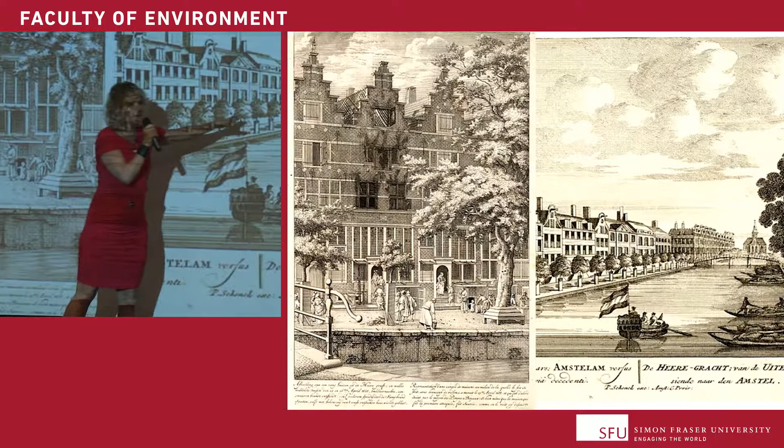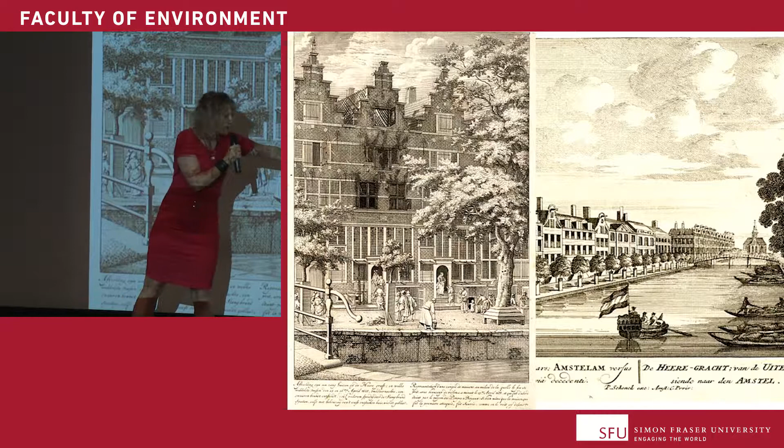And what you see from the 17th century is that they were planting trees. And they actually formed a really stiff structure for it. They made the regulation: it was exactly 4.3 meters between the trees, because it was a construction. And they protected the trees very well. Here you see a very small one, and it's all encased in wood, and over there too. So they also created a maintenance program around it.

And then you got this interesting thing, that they figured out that these trees were actually cooling the city. They were not only making it beautiful, but they also had a cooling capacity. So what did they do? They put trees on the squares. And especially this one, called a meat square. That was where the slaughterhouse was and the meat was sold. Indeed, they didn't have refrigerators, so you had to figure out something to keep things cold.

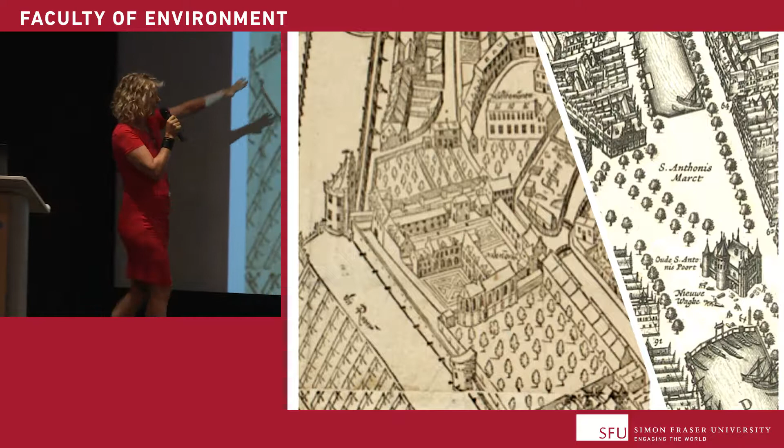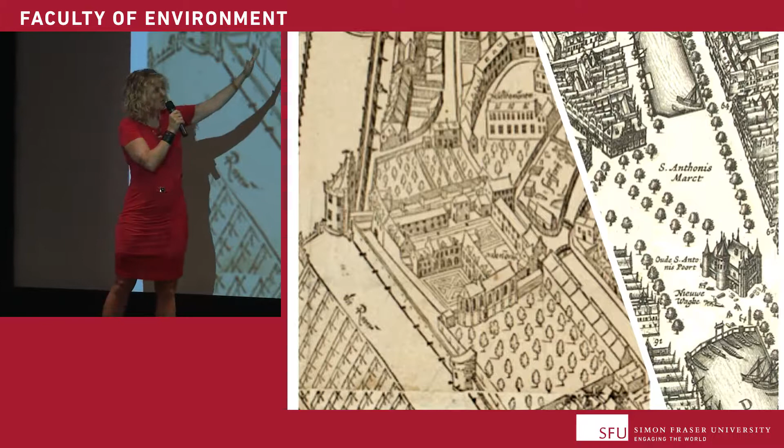So what you see over a century, actually, is that first, this is 1540. There aren't any trees on roads. There are only trees in the gardens of the church. And from 1600, you see this structured pattern of trees on squares and on the canal walls. They didn't put it on the regular roads, because that was meant to be for traffic, from side to side

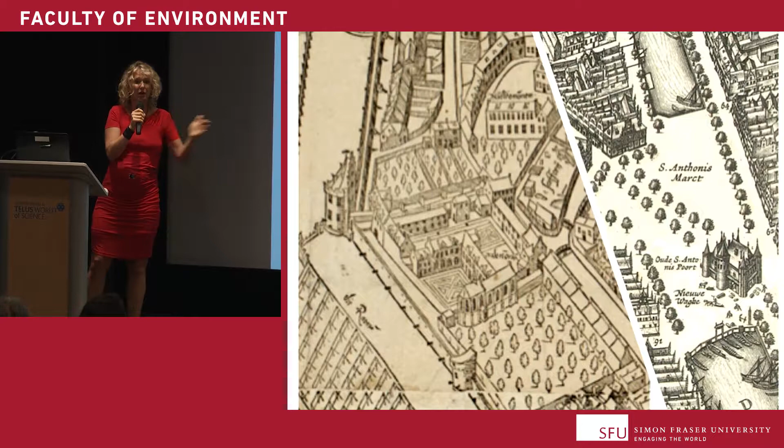for traffic. And I think probably this is a picture of one of my first colleagues working, having his job maintaining the city. These were the people who were planting the trees. But not only planting the trees, they had the tree nursery and the whole economy around it.

Because they started, funny enough, with Linde. I think that's a common name here too. And it went over to Elms. And that was because the wood of the Linde was too soft for the furniture industry. So there was a whole industry behind it. Rethinking green infrastructure is a multi-purpose benefit. And it's a new economy, creates new jobs.

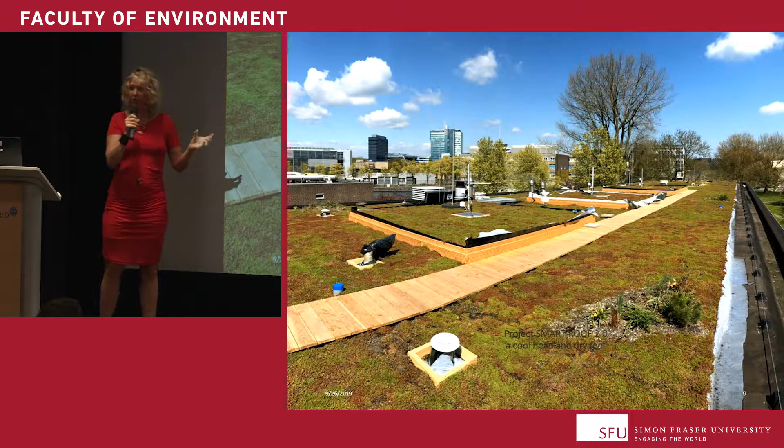Well, one of the things that we do in Amsterdam is that we use a small part of our maintenance operation for innovation. So an innovative approach. What can we do in our regular maintenance? And this is a regular maintenance of a roof, and we created on top of this roof a living laboratory in which we're figuring out how these circular nature-based solutions are working.

And what you see is two very different plots. Actually, one plot has access to water and the other hasn't. And you see the difference: after some months, the plot without the water doesn't develop at all, doesn't provide us the ecosystem service that we needed. And as soon as the plot has access to water, and I will give you later on some details, but I don't think it's very relevant for this presentation, the fact is that the more evaporating capacity we provide to the city, the more interesting nature we have.

And that's not only for the flowers, but especially for the creatures that we want to support in our city, our bees, our insects. And with bees and insects, there are coming birds, and after birds, there are coming foxes. And then we start the whole process over. This is the end of my presentation. We are taking the next step every time, and let's rethink nature together again. Thank you.

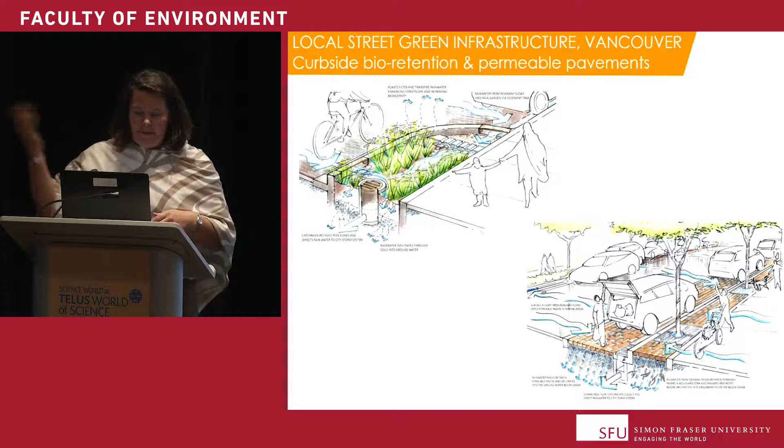So Adil said very explicitly, don't talk about the problems. This is all about the innovative ways that we're all trying to hold the sky up through the work that we're doing. And so I thought I would just touch on a few examples of some of the work that we're doing in Vancouver, starting with green infrastructure in streets and lanes. So here's a couple of snapshots of what you probably see around. Those of you that live out in some of the local residential streets, you might see these nice little bioretention curb bulges. We've got examples of the permeable pavements that are actually here in the Olympic Village.

But as we move forward, we're really looking at how do we be more innovative and start changing our green infrastructure to get an even better performance. So I love the pictures of the beautiful big trees in Amsterdam, and having been there recently, those are very, very small public rights-of-way that are supporting very, very large trees.

I remember early in my career, I put some trees in actually on Kingsway, and I look back now and I actually feel bad. Like I actually made those trees suffer because I didn't give them enough soil in how I did the designs. This is when I was working in transportation. And so now looking at it as a new lens with green infrastructure, we're looking at some new typologies, and this is one of them that we're really excited about, and we've actually done quite a few now in the city, and we're monitoring for performance.

This is called the rainwater tree trench. So what looks on the surface like any other street is actually a huge and ample space for soil and rainwater runoff beneath the surface. So right under the boulevard, right under the bike lane. And the intent of this is basically to give those trees the soil and the nutrients and the water access that they need to be very healthy trees with very large canopy so that they become, again, part of our water system. Most people don't think that trees are actually like giant water pumps. They help transpirate a lot of water, and they also help cool our city and bring so much habitat value.

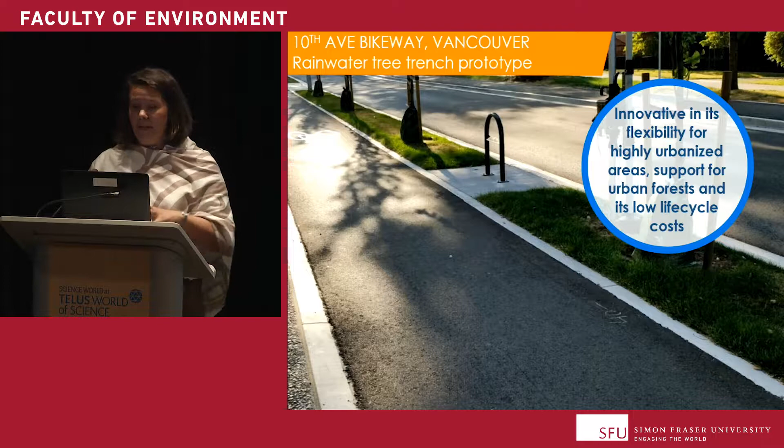So we're quite excited about this because in many parts of the city, it's very, very dense. And when you talk about bringing in bioretention or bioswales into the public right-of-way, a lot of people get nervous about how we're going to fit it all in. Well, this is a green infrastructure strategy that allows you to benefit from the ecology in the soil to help clean the water, the ecology with the root system to help address pollutants, and then again get nice healthy trees in our city.

This is another project. So down on Quebec and 2nd, actually just in this neighborhood, you can go for a nice walk and check it out after if you like. We've actually got a pilot project where we're doing 4 different approaches to green infrastructure in this one area. We're doing a conventional street approach, we're doing bioswales, and then we're doing a stormwater or rainwater tree trench using a structural soil approach, and then one that's using a soil cell, which is like a plastic crate that actually provides the structure and then an ample volume for soil.

And so as part of that research, we're testing to see how well the different systems perform. We're looking at how much they cost to maintain, because maintenance budgets are always top of mind for many, many folks, especially at the city. So one part of the pilot project that we're testing here is actually using a sedum mat, which most people use on a green roof.

So we're actually trying to see if it is a viable alternative to a grass boulevard. So you don't need to mow it, and it tends to be very drought resistant. Looks good. I mean, right now it's flowering. I don't know how it looks at the moment. We'll have to monitor that. But it's just another one of the little ways that we're experimenting and trying to explore how we can use green infrastructure to its fullest potential and make it cost effective and also enjoyable for the city.

So for Vancouver, we've been doing green infrastructure for probably about 20 years, but what I would say is that we've typically done it as a one-off initiative. So we've had some great leadership in the private sector, we've had some great leadership in the public sector and at Parks Board, but we failed to make the transition from pilot projects to a broad new way of doing business. And so one of the pieces that we're doing now is trying to say, how do we not use these as a nice to have or the icing on the cake or the little dusting of green on the urban jungle here in Vancouver, but actually a really strong part of our water management systems.

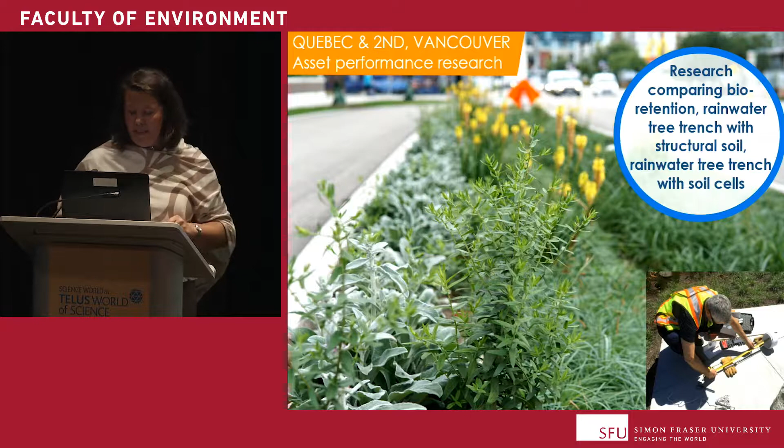The storms are coming in. It's staying for the right amount of time to get the water quality treatment. They're drawing down, and the water is going back, soaking back into the earth. So so far, we're really pleased with how that's progressing. I mean, this is maybe a little bit more on the technical side of things.

This is 63rd and Yukon. I'm not sure if there's any folks here from South Vancouver area, but I encourage you to go down there. This was a leftover corner piece of land in the Marpole neighborhood. And as they were going through their community plan, the community identified it as a potential for like a little mini community park or some such amenity.

And so some keen eyes in our planning department thought, well, this is actually an opportunity to showcase rainwater management and how can we bring that into a community amenity and public space. And so there's a beautiful project down there that's actually just a really enjoyable place to be.

We've got a neat partnership with the Museum of Vancouver and some local Indigenous youth from Musqueam, Squamish, Tsleil-Waututh, and Tsawwassen Nation that have produced some beautiful artwork that we're hoping to install in the coming year at this site.

And for us as a city, it's been a chance to actually test some new ways of delivering the service. So we've got some new inlet designs that we're trialing for our construction crews. It was learning about what are the methods that they need to use to allow water to infiltrate back into the ground and not excessively compact.

And of course, for our crews, it was also a really innovative initiative in that we were able to reuse the soil on site. So rather than preparing a construction site by scraping all the soil off, taking it away as a waste product somewhere, and then bringing in fresh soil for all of the plants, we actually had our team, urban ecologist, look at how we could amend the soil to bring the right composition to get the outcomes we want, both for plant health, but also for dealing with the pollutants in the stormwater.

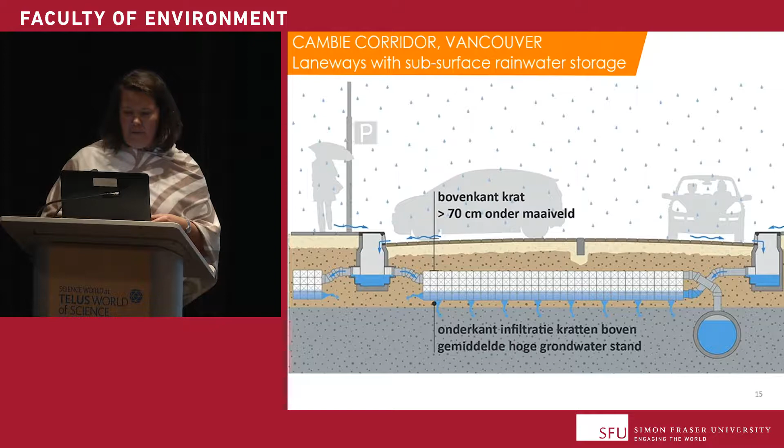This is just a little snapshot, and you can tell that the Dutch are everywhere. They're influencing us in big ways. But thinking about how we can actually make better use of our roads, because right now roads are just generating rainwater runoff that's often polluted. How can we actually use these public spaces to help us better manage water, even if we still need to have that kind of surface use?

So just a couple of other examples of things that are sort of inspiring our thinking here in Vancouver. This is the MEC head office, actually in the False Creek Flats neighborhood. And what was exciting about this project, it was one of the first Salmon-Safe projects in Vancouver. I think the airport is also designated as Salmon-Safe, and that means that they're taking great care through their entire development process to look at how the building can protect and enhance salmon habitat.

So they're looking at how they capture and clean the pollutants. They've got green roofs, they've got blue roofs for a water harvesting system, and they've got a whole range of bioretention systems and filtration systems, both for their parking lot and the front.

So that's a really great example of leadership from the private sector. Smart Roof 2.0. So a team of us actually went to, this is how we first met Sasha. We went to Amsterdam. We were very inspired by the Smart Roof.

I think what really stood out for me is that in our community, our current standard is to manage 24 millimeters of rainfall a day. And we go into the Netherlands and they tell me that they're managing a minimum of 60 up to 150. And I said, boy, when we talk to our development community, I saw Margot and a few other people from industry here, you know, when you talk to them, okay, how can we manage this much more water in Vancouver with climate change? We really need to. They look at you like, we're not sure how to do it.

And so I thought, okay, well, look at what they're doing in Amsterdam. If they can manage 60 millimeters and think about how to create these incredible biodiverse urban cooling hotspots in their most urban and dense areas, including on wood frame buildings, so can Vancouver. So what we're really excited about is that we now have a partnership that we've initiated with the City of Delta, with BCIT and ourselves.

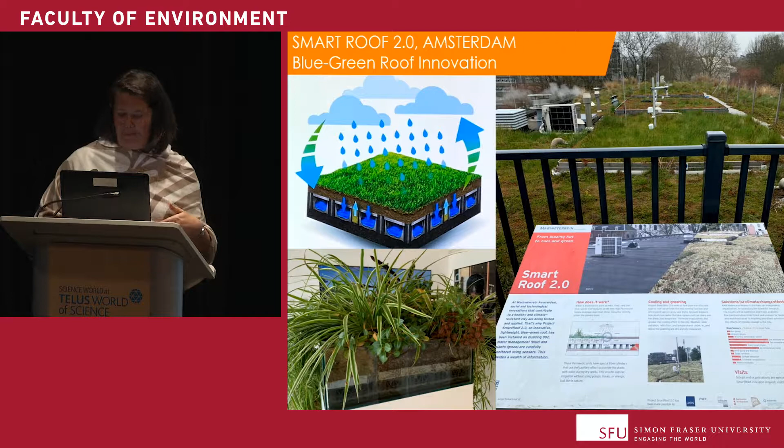There we go. Okay, something else that I'm quite excited about for Vancouver is the idea of water harvest and reuse. What a lot of people don't realize is that in the future, water scarcity is going to become much more of an issue, and people perceive water to be plentiful here. And so thinking about how we can harvest and reuse water to meet our future needs and manage stormwater is something we're really excited about.

Obviously, this is a real showcase, and most people don't realize that this beautiful convention center that has a fabulous green roof is also treating mass quantities of black water. And it's funny, the operator said to one of my staff recently, gee, I wish we could just get more toilet water, because actually our production facility could do a lot more. We could be generating a lot more water for the community. So these are some of the ideas of thinking about district scale systems and how we integrate water harvest and reuse into our long-term objectives.

Okay, so in our local neighborhood, again, looks great, Olympic Village, beautiful, love the Terra Breads and all the other great places to go there. But what I'm not sure if you know is that our most beloved Hinge Park is actually a stormwater wetland. Hinge Park is actually managing 2/3 of the stormwater runoff from the entire community. The other 1/3 is in the giant bioswale along the bike route along Ontario Street, which I'm sure many in this audience know.

So our stormwater infrastructure there is doing so much more than just caring for water. It's creating amazing habitat, including beaver habitat. Maybe the locals can let me know, I heard that the beaver had 2 babies recently. Yeah, 2 babies. But beavers are very territorial, according to our Parks Board biologists, and this is problematic because the beavers are growing up and they've got no other habitats to go to. So I don't know what's going to happen with that, but it's the same challenge for all of the millennials and others in Vancouver, that we have a serious housing crisis. So we better start looking at where we can expand our habitats for beavers in the city.

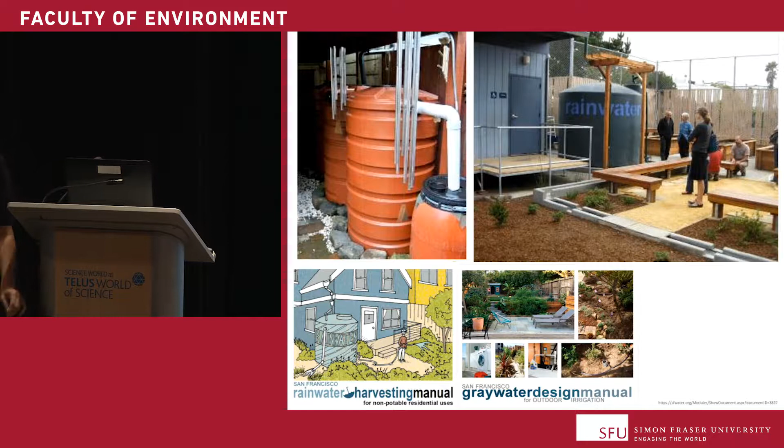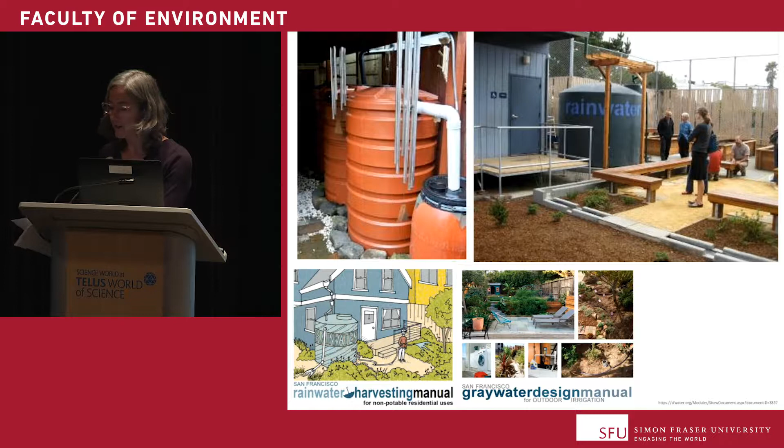We were approached by a woman who was an epidemiologist at the Department of Public Health, who wanted to basically install her own rainwater harvesting and reuse system and treat it to really track and monitor the public health impacts and the quality that she could achieve in her own home. But there was no guidance and there were no rules for her to follow. And anybody that came to the departments was just getting flatly denied. And so we felt like that is something we really wanted to take on and work through.

So we created a working group with our Department of Public Health and our plumbing inspectors, and we hammered out the first memorandum of agreement that was approved by the Public Health Department for flushing your toilet with rainwater. And the funny thing was that the first response was, oh, well, you have to be able to drink this water. We're like, really, from the toilet? And so we continued to have this discussion and really talk about the perception of risks and the actual risk.

And through these discussions, it really became clear that we had a pretty open-minded public health department. And the gentleman, Rajiv Bhatia, who was the department lead at the time, said, you know what? The rainwater is not the dirtiest thing in your toilet. And we were like, you know what? That's right. Because he said, as soon as you take a toilet on, it's really up to you to make sure that it's clean.

And the response that happens when you have an overflow is basically people mop it up with some bleach. And so basically you were covering the same risk response for much dirtier water than you would with the rainwater. And so we were able to achieve an agreement that allowed you to flush your toilet by just simply diverting the sediment. There was no advanced treatment required. And so that was a really wonderful breakthrough, and I would really encourage people to meet with the people in San Francisco and talk through what the lessons learned were, because it's a fairly rational response.

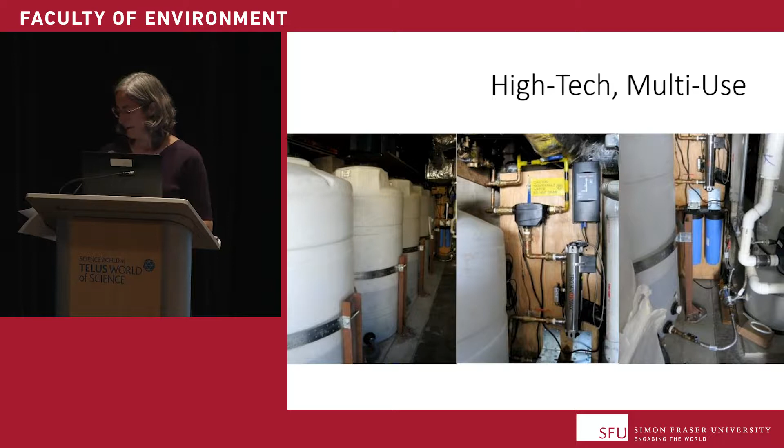And so in a parallel effort, and my beloved old colleague Donna Haase is here today. She was a team member on this project, so it's kind of a treat that she's here.

In a parallel effort, I was invited to be part of a team that was developing our new agency headquarters. And at the time, we'd been asking our ratepayers to really have a lot more investment in conservation and adhere to higher standards for conservation. And our leader at the time challenged a small team of us to develop a sustainability program that would really walk the talk and to showcase these sustainable measures that would either look at power, wastewater, and water.

And so 98% of the conversations were about power, right? And he had asked us, can you try to get an off-the-grid high-rise? And so that was the challenge that we were to look at. And almost everything that I'm talking about is in a built-out, dense urban city. So this is really the challenge, right? And this neighborhood is considered a historic designation neighborhood that we're in. It's a Beaux-Arts neighborhood, so just to set the context a little bit.

And so what ended up happening was we focused a lot on power, and at the 11th hour, we had looked at doing an on-site wastewater treatment that was a high-intensity energy use, but it continued to blow the power budget for the building. And so we looked into these low-energy wastewater treatment systems, and we developed something called a living machine, which is a constructed wetland that pulses the wastewater through it twice a day. So it mimics a natural wetland system. So it has a high level of biological activity.

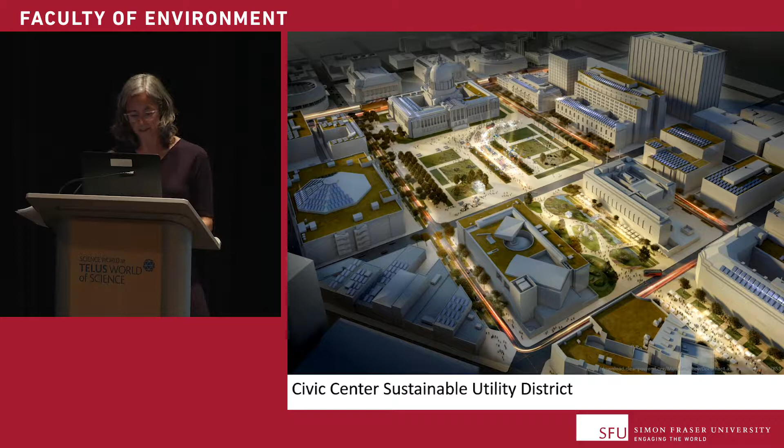Not only would it be that, but it's also a very highly visible tourist destination, so it could be a great educational environment. So a lot of this thought leadership coincided with the beginning of a pretty serious drought. And in 2012, the agency really committed to reducing its potable water intake by about 10 million gallons per day. And I didn't translate to metric system for you guys, I apologize, and launched the non-potable water program.

And then in the Bay Area in San Francisco, we have a lot of these high-rise developments that penetrate the groundwater, and they're continuously dewatering, and that's another great source of water. And the co-benefit of that is it's not taking up space in your sewer all the time. So it was really for the first time that both of the departments, the wastewater and water departments, were working together, really thinking about how these different goals could play together, both from a regulatory standpoint and from creating incentives and strategies around these things.

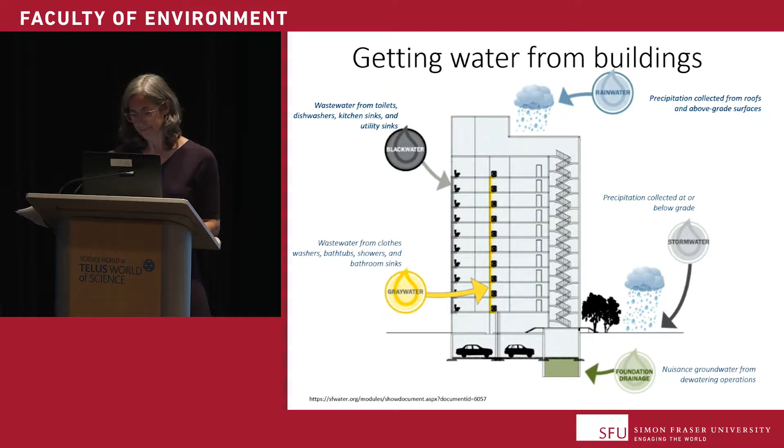So the program really evolved over time. We began first by just allowing it to happen, right, in a single building. And then the question was, how do you do the governance and the oversight going between buildings? And then over time, we began to require this of all new buildings. So all buildings over 250,000 square feet in San Francisco have to put these non-potable reuse systems inside.

And it is creating a lot of change, right? This is a brand new set of ways of doing business for the industry, for designers, for the utility practice. But it is a drought-stricken environment, and this is basically water that is available and would have just all been wastewater at that time.

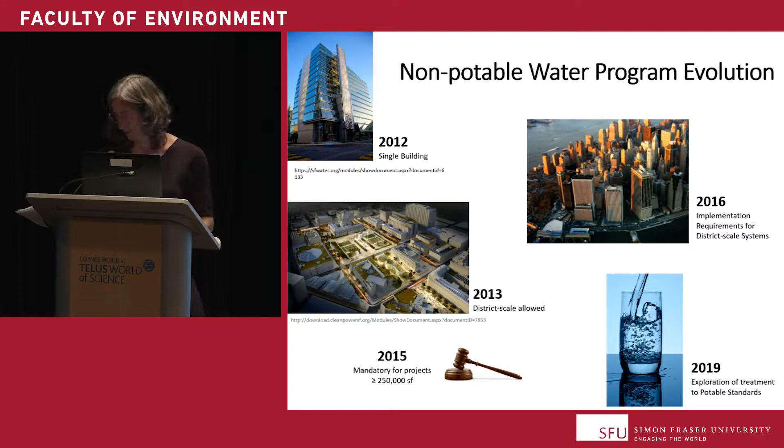And recent advances are that we're now beginning to look at how to take this black water and treat it to potable standards. And so there's a demonstration project at the agency right now to do that with the living machine water. And so if you go to San Francisco, you can begin to see these projects that are sprouting up that really show the coming together of these different ordinances and guidelines that all got into place. So this is really what the use of rules and regulations and advanced planning can achieve over time, especially when you have a really robust development community and you get these systems in place in advance.

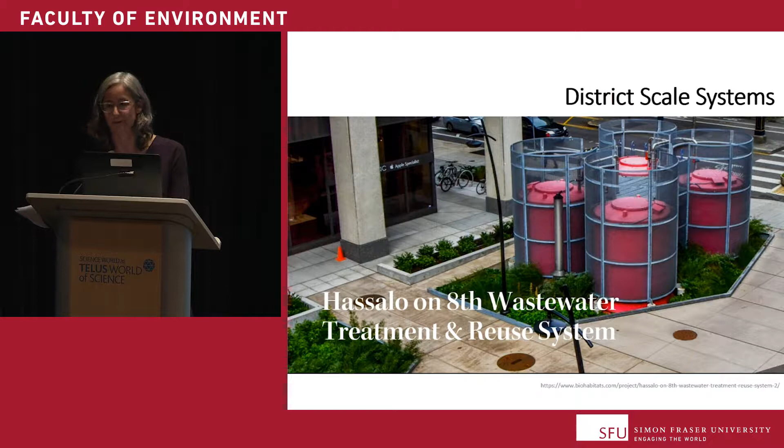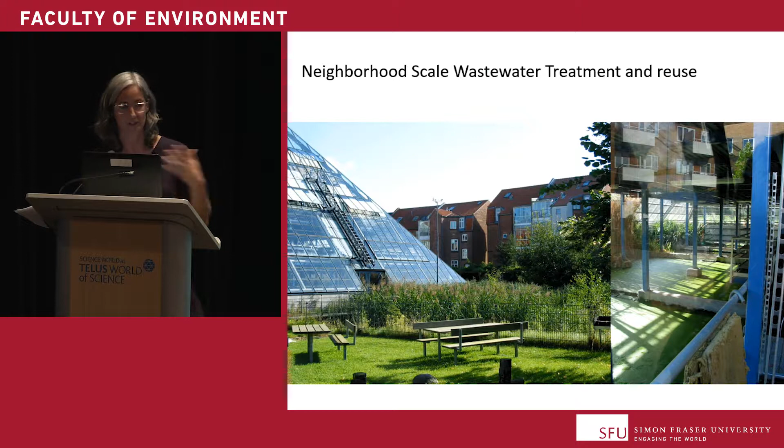And so there's some examples. I think San Francisco really stole a lot of ideas from a lot of great examples from different places. Portland's been working on district scale systems that you can go and see. When I was in grad school, I went and visited these really wonderful and whimsical examples. This is a lower density residential block in Denmark, or in Norway, which has a wastewater treatment system that also is used for growing plants. And so it's an economic development project where they're selling 40,000 plants per year. That is raising money as well for the neighborhood.

Here's an example of an ecological laundry where they're using these living machines to treat laundry, and it's like a residential gathering place. It has aquariums with turtles, and the fish and the turtles basically move in the direction of how clean the water is, so it's a biological indicator of how treated the water is.

So these are some great examples. And I think the question is, what's next, right? We've advanced all these questions, and what do we need to think about next? And I think the sobering question with tomorrow's climate march and all is, how are we going to explain to our children that we use water to manage sewage? Like, that question was, you did what with potable water? And I think there's some examples to be found in where we're headed next.

I think the Bullitt Center in Seattle is one of my favorite examples, because up until this time, I hadn't seen any composting systems that were in a dense city, right? You see them in these sort of eco camps and suburban environments or rural settings, but this is a 6-story building that has basically a waterless sewage system, and it has composting in the basement.

One of the losses of the living machine in the San Francisco project was that all the wastewater operators were like, well, you still got all that solids. Got to go in and pump that out, and that was a loss, right? You didn't win on that question. And then these solids have to be digested and then trucked and spread on farmland or put into landfill, so that's a loss. But what I really like about the Bullitt Center is it composted on site where it gets really small, and it only needs to be taken out once per year. So these are the kind of innovations that make a big difference.

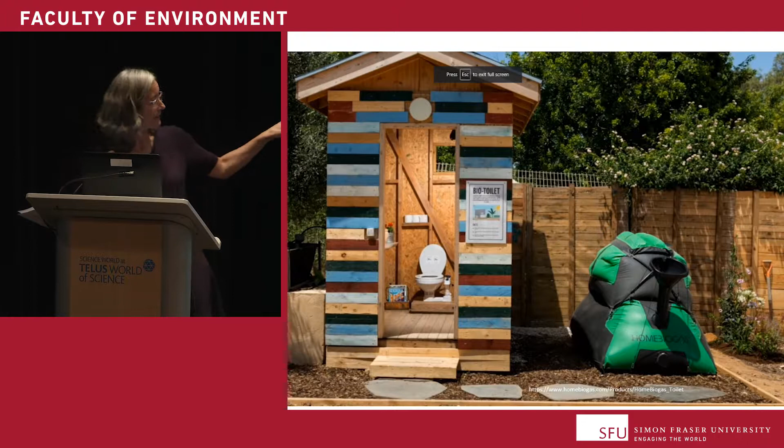And then taking these ideas a step further, a couple years ago I ran into this company called HomeBiogas, and they had created a product where you take your food scraps, your compost, and you put it in this backyard system, and it creates enough fuel to give you cooking fuel for 2 hours a day. And I was like, whoa, I wish that they could do something with sewage, and they did. So they created a composting toilet that connects to a fuel system for your stove. I asked them, what do you do with the solids? There really aren't that many solids because they compost it down so much.

And so you could imagine a system like this where in San Francisco anyway, we have curbside compost collecting. You could basically probably have this system and put it in your curb. And so this is where I think we need to head, right? We need to get water out of our sewage system. We're going to be needing to drink that recycled water. There's not going to be enough.

And then even further, a lot of these systems, as you see them, have a lot of extra pipes and pumps and treatment systems, and they're really high energy intensive. And while resiliency is not the same as efficiency, I think we're going to be looking at a lot less available power into the future, and we need to start thinking that way as well. So how can we look to ancient practices, places where there was the genius of bringing water in and also doing it with beauty and a sense of the sacred about it.

And so how can we merge those pieces with what we know about public health? How can we bring what's the best about what we've learned through regular sewage treatment, that we're not getting sick all the time from sewage in our water, and bring those two together? That's the challenge I give to you all, to really think that's where we need to go. That's the end. Thank you.